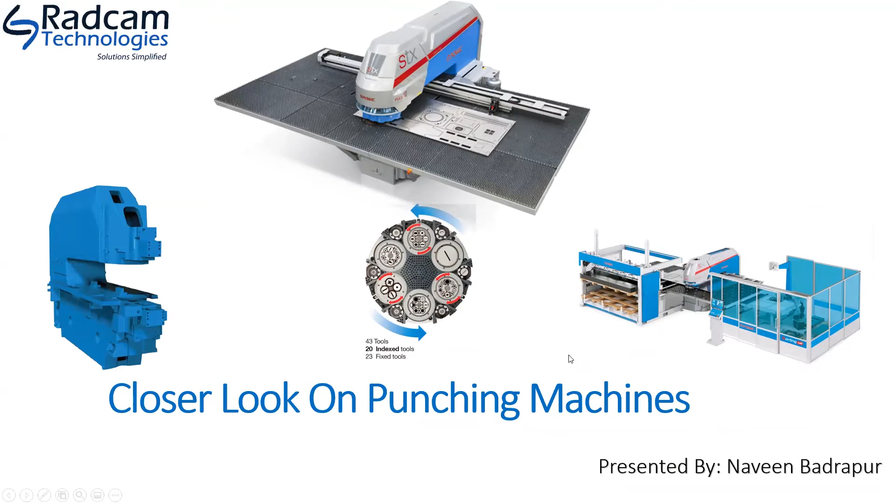Punching machines are basically programmed to move sheet metal in the X and Y direction to position it under a ram, which is ready to punch a hole or make a form in it. Usually, when we are talking about punching machines, most materials processed range from 0.5 mm thickness to 6 mm. That is the usual range we have.

As many of you know, the thickness a punching machine can process, most of that capacity, should be attributed to the tonnage the machine has. Usually the machines will have different tonnages based on the technology and everything. So the ideal range for punching machines is 2.5 mm to 6 mm thick. At 6 mm thick it's a little difficult to do forming operations, but punching and everything else is fine, that's the green zone for punching machines.

These machines may also perform 3D forms like dimples, taps, screw threads, electric knockouts. I hope you know electric knockouts, like we do when making electrical control panels - we use the knockout tool to create an impression, and during wiring they can simply knock out that part and take the wire through. So things like that, and louvers for airflow and everything. These forming operations are only possible in punching machines, you cannot do that in laser machines. So that's where punching machines come in.

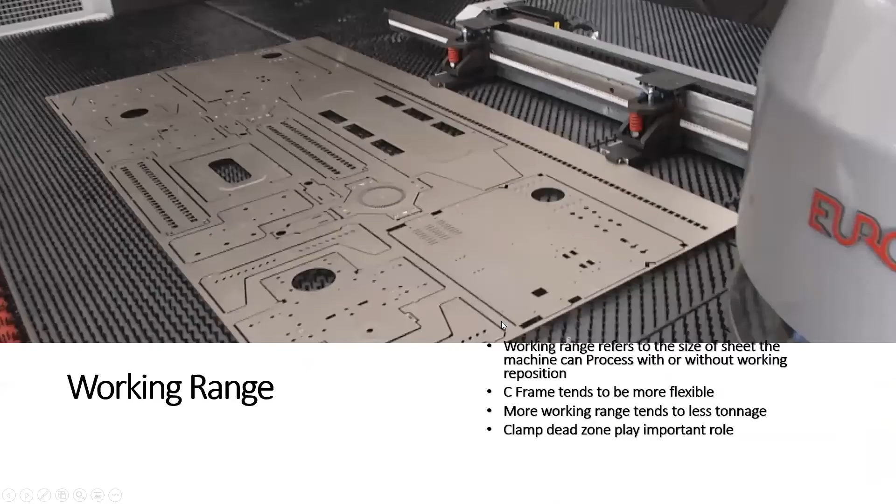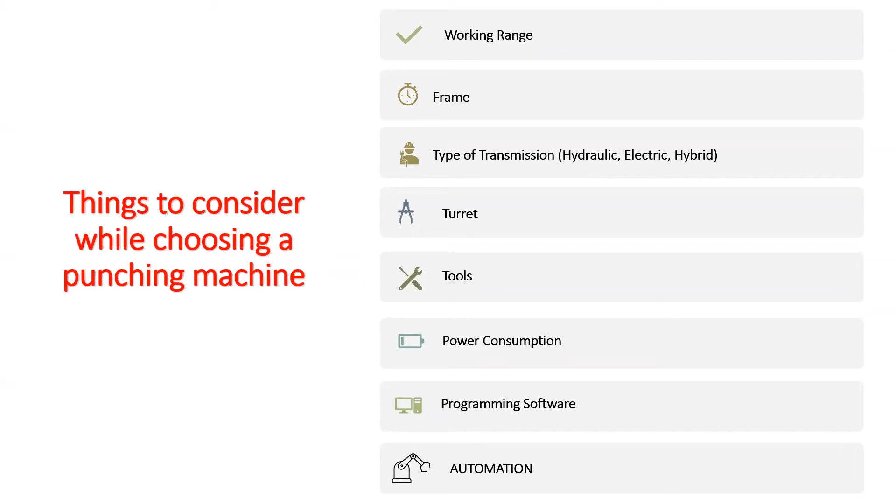What can be implemented with the machine, and can we add on some options after purchasing a machine, or should it come with the machine itself? That's the kind of things we can look into for automation. And then, without any further delay, let's start with our slides.

So the first thing is working range. I hope everybody knows what working range is - it's a very simple thing. Usually working range refers to the size of sheet metal a machine can process with or without repositioning. Usually the sheet metal machines will have clamps, and the clamps will hold the sheet and move it along the bed of the machine, bringing the sheet into a ram, where the ram punches the hole or forms the sheet.

So there are standard sheets like 2500 by 1250, that's why in feet we call it an 8 by 4 sheet. And then we have in width, 1500. So these are the two standards usually punching machines play with.

So why does the working range matter? It's very basic. If the working range is big, you can process bigger parts. If you have smaller parts, you can still work with a smaller working range, but the machining time will increase. That's the basic idea. If you have a bigger working range, you have much more flexibility.

Let me play a video that will show you exactly what I'm showing. I will play an O frame first, and we will see how the O frame works, then I will play a C frame and we will see.

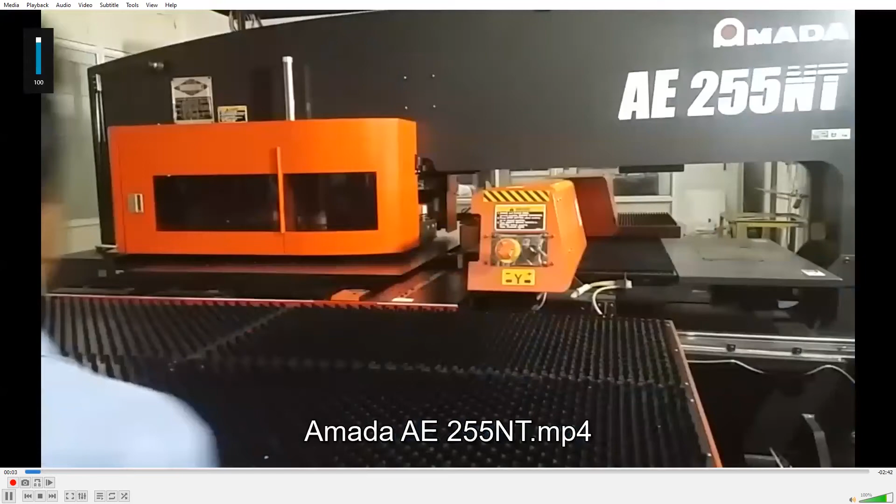As you can see on the screen, this is an Amada machine. Right now it has an O frame. I'll show you - the clamps are moving and it is able to punch the sheets. It will come a little darker and then I will pause and explain certain things. The turret is rotating, the tools are changing, and as you can see in this area, we have a sheet, clamps, a turret, and everything.

So this is the depth I'm referring to. I hope you are able to see my arrow - this is the depth I'm talking about. If you have this machine and they have rated this working range as 1250, that's it, guys - you cannot use bigger sheets than that, because there is no room here to accommodate such sheets. This is what we call an O frame.

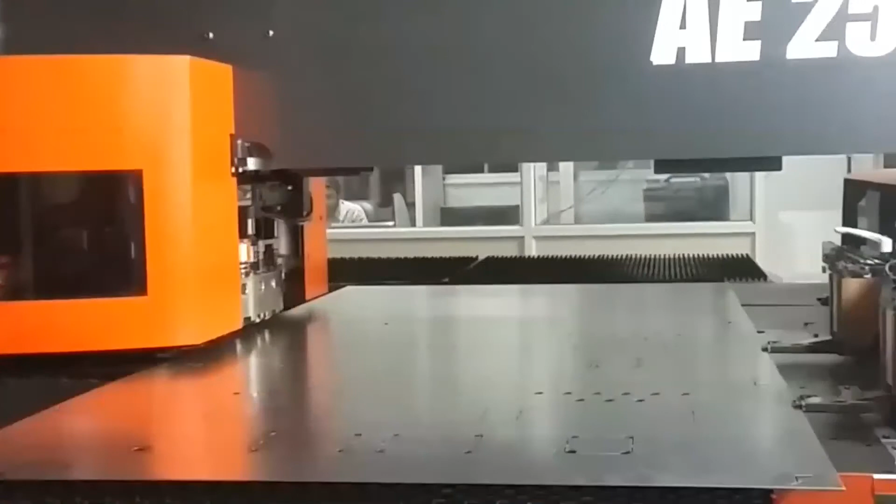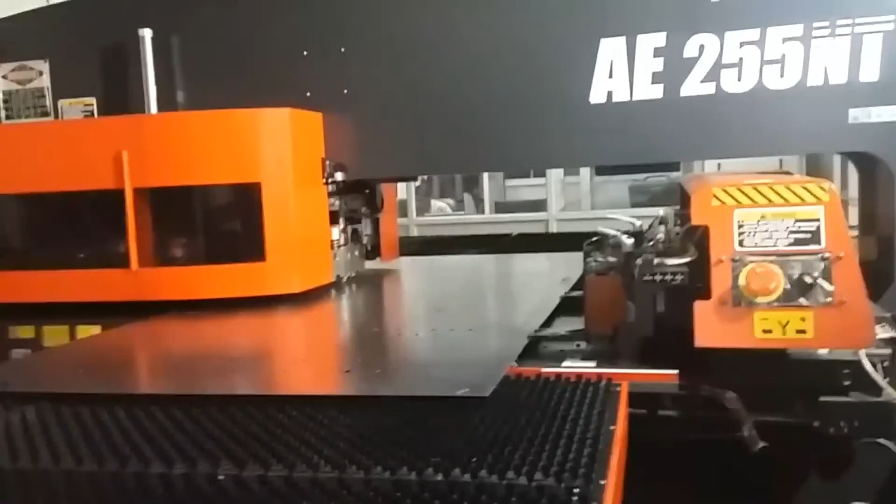In O frames there are also welded frames and casted frames. Of course everything is casted and then some parts are welded together, but some providers do provide complete casted frames - a single piece casted frame is also available, so you know the differences. The casted frame might give you better life and something like that. As you can see here, this is an O frame, and it's restricted by the depth.

So let me play a Euromac video which employs a C frame. So this is a C frame - as you can see here, is open. Just one side is open.

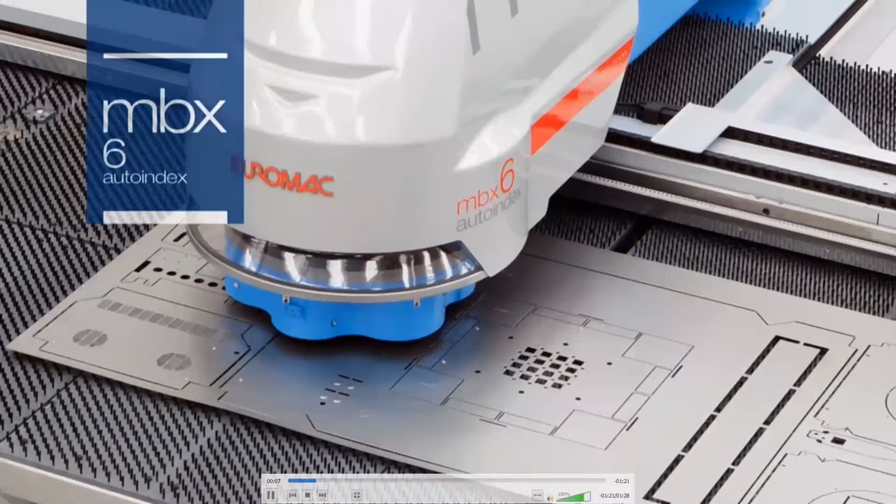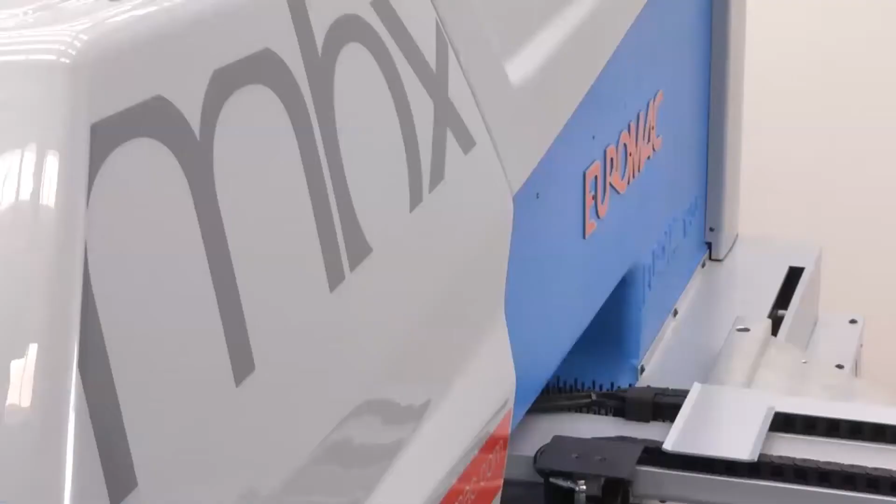Nitin Sharma is saying that two frames are welded and bolted. So thank you.

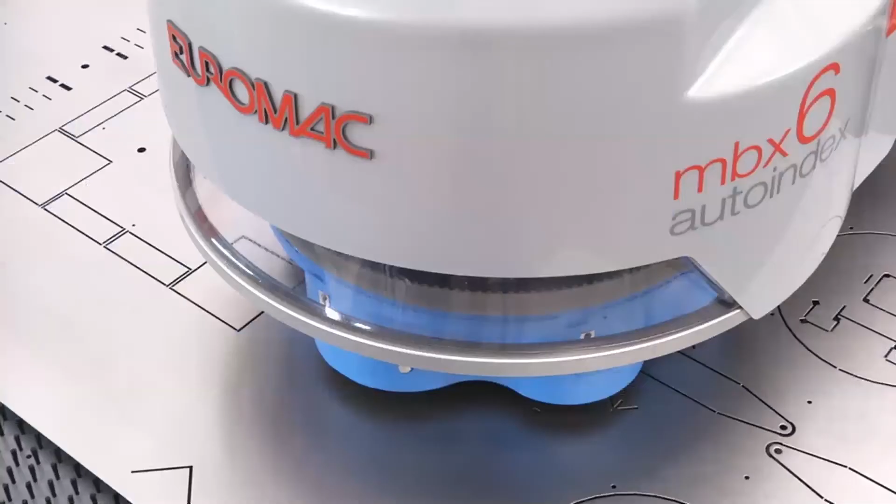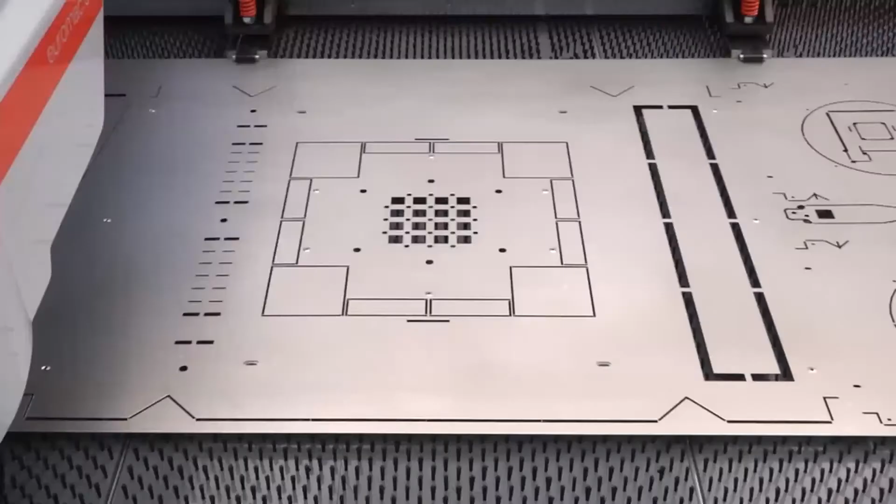Here, as you can see, in these C frames you have the flexibility to use sheets which may be bigger than the rated capacity. So a little flexibility never hurts, right? So this is the turret, and we will come to this a little bit later. Let me close this, we will go back to this.

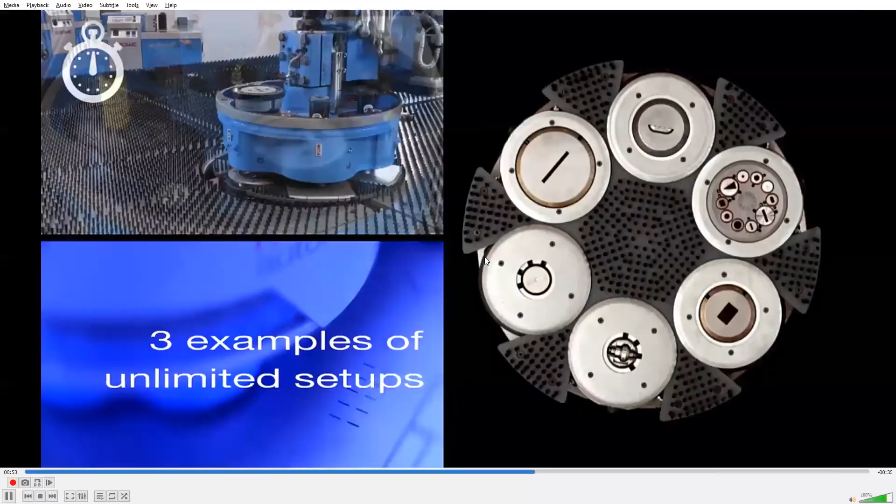So that's the basic idea - if you want a little flexibility in your work, you should go for a C frame, or if you are fine with rigid and fixed working areas, the O frame works just fine.

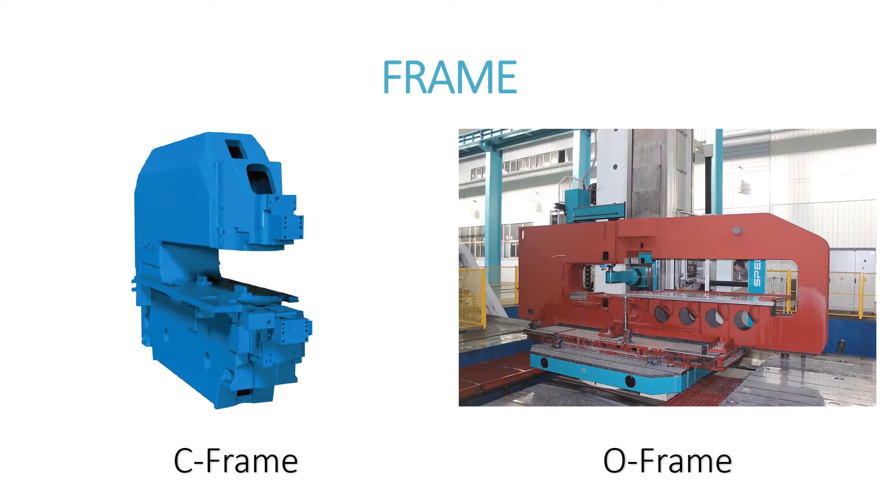This was supposed to be about a type of transmission. I'm missing a headline here, so I will explain.

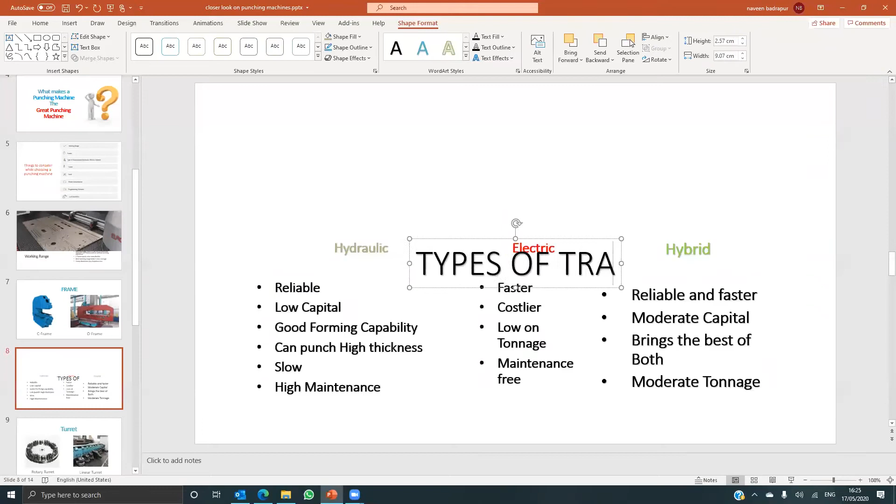Everybody has heard of hydraulic and electric, I guess. So what makes a hydraulic machine or an electric machine? Today we will look at why you should go for hydraulic, or why you should go for electric, or why you should go for a hybrid. I will explain what a hybrid is, and then explain what makes them special in their own areas.

So first we will go to hydraulic - robust, time-proven, a solid kind of transmission. It's been here since the industrial revolution, and we don't see a machine without at least one part of hydraulics in it.

The participants are sharing their thoughts - so please try to share your thoughts there.

So hydraulic is a time proven thing. Here the working principle is pretty basic - you have a hydraulic tank, and a pump to feed hydraulic fluid to the hydraulic circuits, and then you have a cylinder, and the cylinder delivers the power, and you get your work done. That's what we call hydraulic. Reliable - you get constant forces, and you can achieve a very good amount of tonnage in hydraulics. That's what we call reliable.

Let me show you a video. Yes, please, someone is asking a question. Okay, we lost him. I was having a little bit of trouble hearing you. If you can put the question in the chat box, I'd greatly appreciate it.

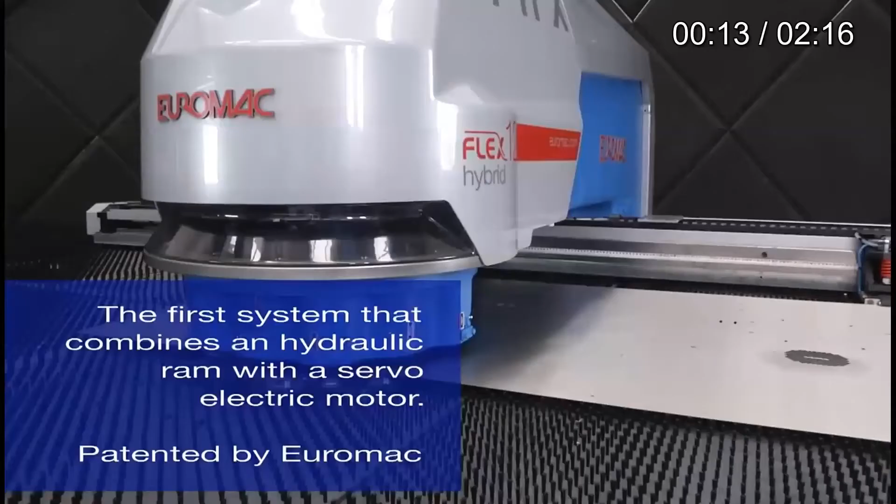So I have a small video to show you what exactly a flex hybrid is - an innate system that brings the best of two technologies, hydraulic and electric. Power consumption is very low because the majority of the force will come with the tonnage.

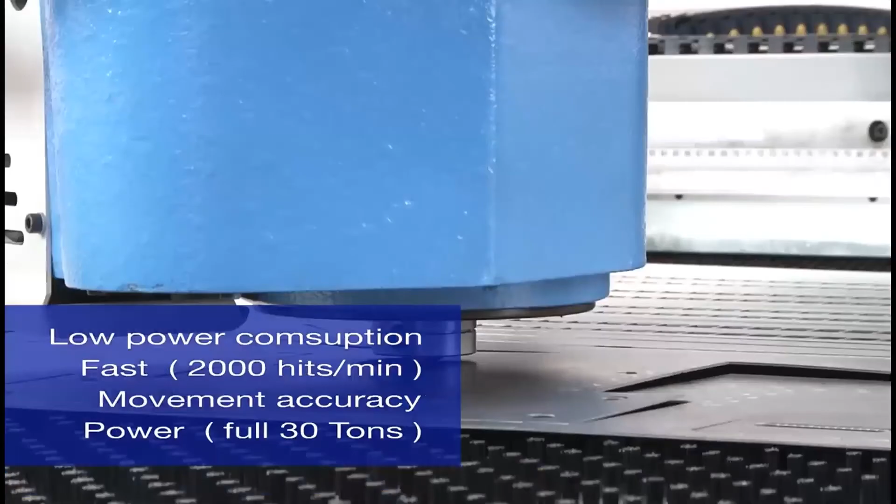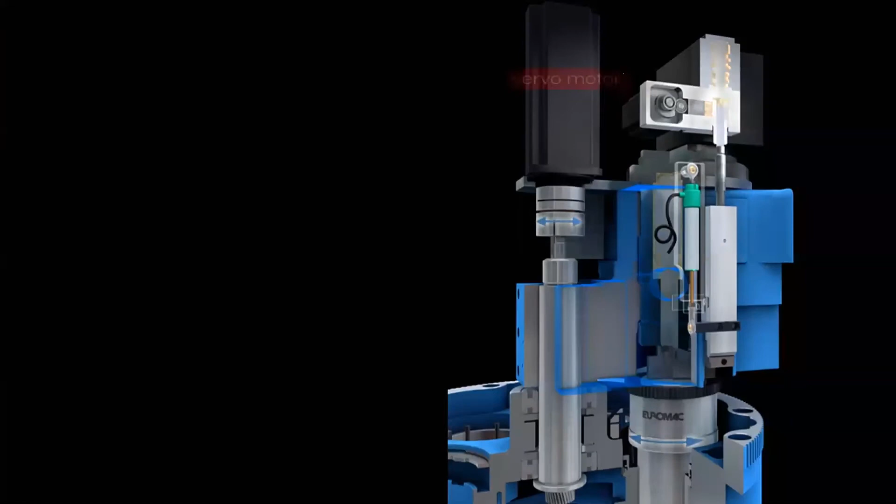This is a demonstration of a punching machine with punching, engaging and everything. We have a sheet loaded and it's moving. So this is the area - you can see we have a servo motor on the left side, and on the right side we have a hydraulic cylinder. The force will come with the hydraulic liquid.

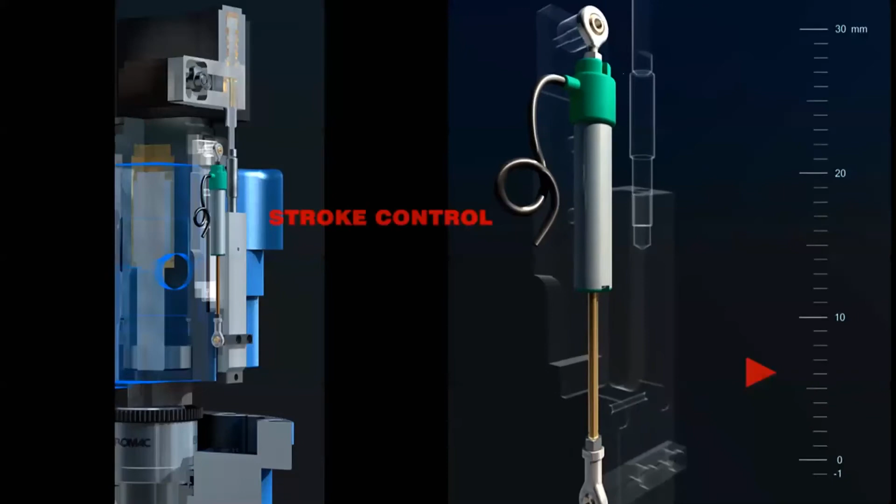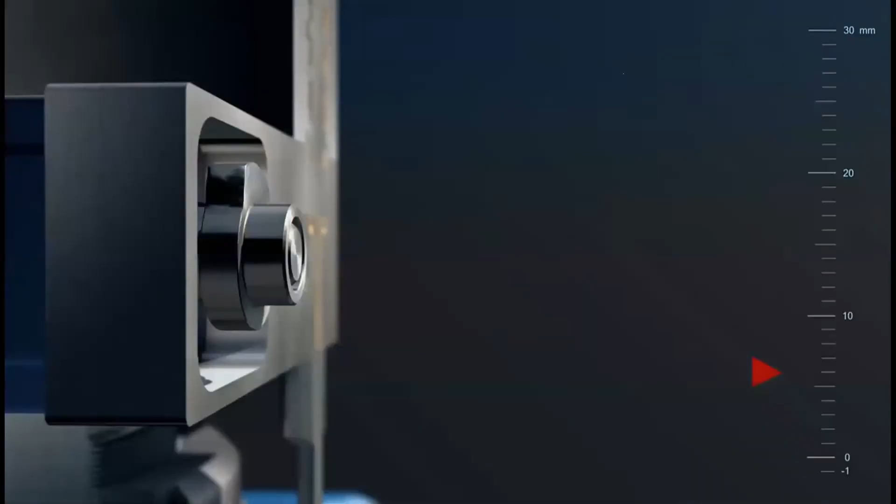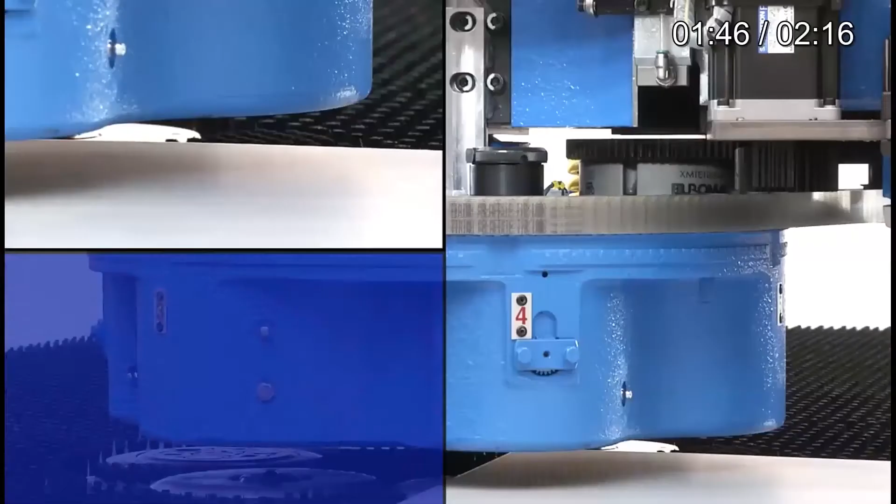But we have a servo motor here which will control the stroke length - how much it should go or how much it should retract. When we control that stroke length of the hydraulic fluid, it will automatically be able to punch in very fast numbers. We have a cam coupled to a motor, and it will deliver that hybrid system.

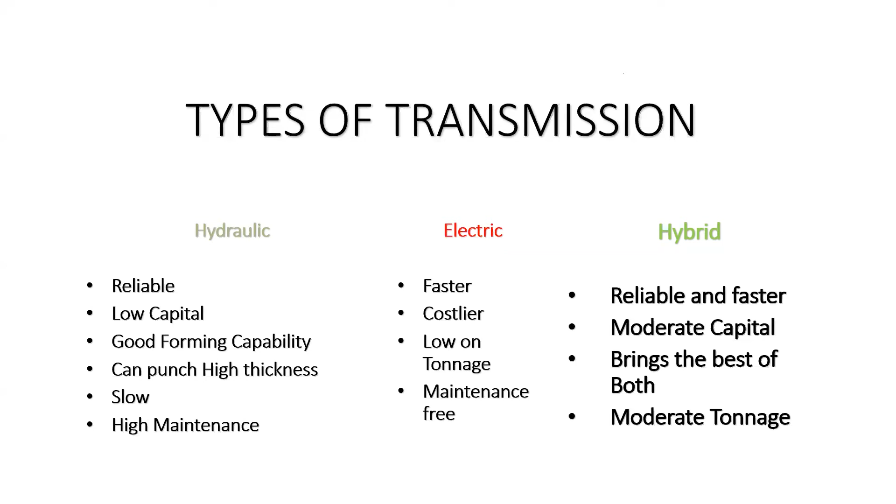So hybrid is actually incorporated with the Euromac punching machine. That's a patented technology - nobody can use it without Euromac's permission. Euromac has the hybrid technology, hydraulic machines, and a pure electric machine. If a customer prefers a pure electric machine, Euromac has that too. But it doesn't matter where the power comes from as long as it serves your purpose. So we have brought the hybrid.

Here you can see the turret is holding different sizes of tools - the size of the tool matters, I'll go briefly into that a little later. So here it's Euromac, Amada, Trumpf, and Prima Power - all employ rotary turret, except not Trumpf. Prima Power has a rotary turret, and Trumpf has a linear turret. So basically it's about the same, but...

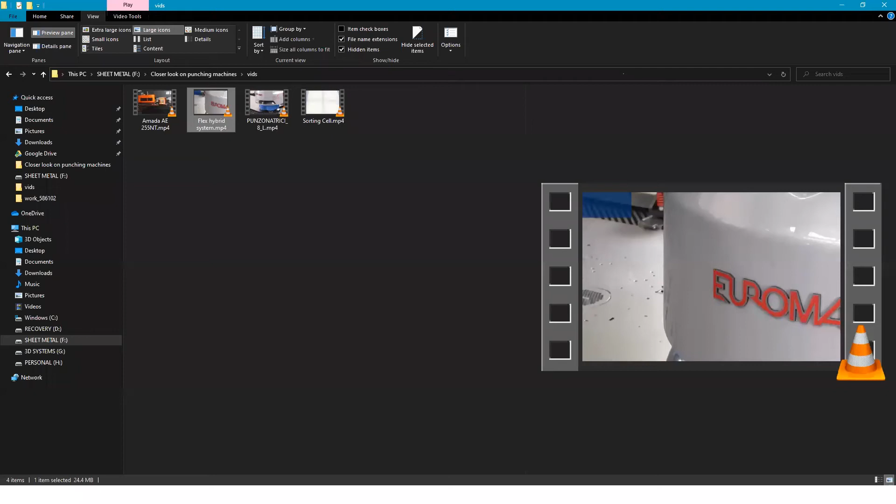Right now the Euromac is the only machine which gives you an all D station turret. We were playing a video at that time covering that. So yes, this is what we call a turret, guys.

You can see here, the Euromac has 6 stations. That sounds a little less in number, right? Because we just saw in the image that it can accommodate a lot of tools. Well, it looks like it can accommodate a lot, but this small turret can accommodate 60 tools - that's enough for everybody's production, right?

So you can see here, the turret already has 6 stations, and with the help of adapters we can use B or C stations. We have an A station there, a B station there, and a C station there. And one more thing - there will be auto index stations.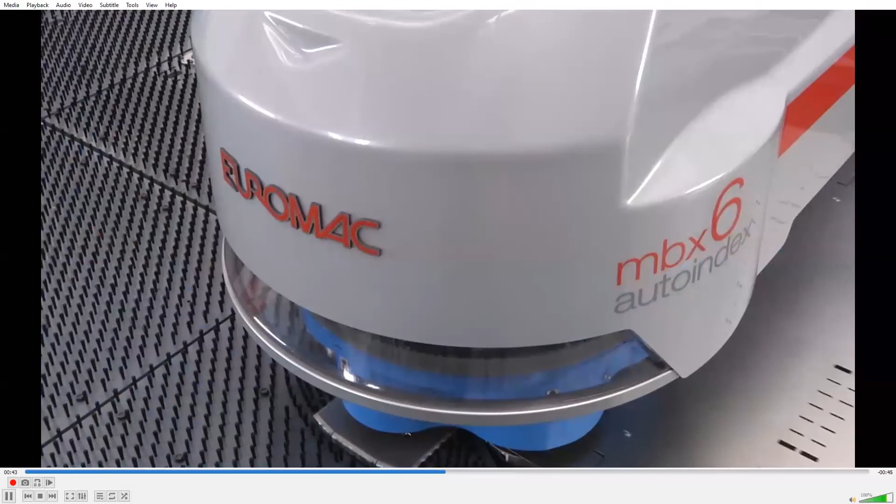Auto index means - usually for sheet metal tools we use rectangular or other shapes. So auto index means the tool's capability to rotate itself in any direction. As you can see there, some tools are rotating.

That means in that station, the tool can be rotated in any direction. Let me explain simply: if I want to punch a rectangle of 100 by 100, and I have a 50 by 10 or 50 by 5 rectangle tool, first it has to be positioned at 0 degrees, and I will punch the top and bottom of the rectangle. Then the tool has to be positioned at 90 degrees, and I will do the left and right sides.

So for this operation, we basically require 2 stations if the machine doesn't offer auto indexing capability, because the tool cannot rotate. You have to load one tool at 0 degrees and one tool at 90 degrees. But if the machine offers auto indexing capability, it will automatically rotate the tool and punch it in one go. That's what we call auto index.

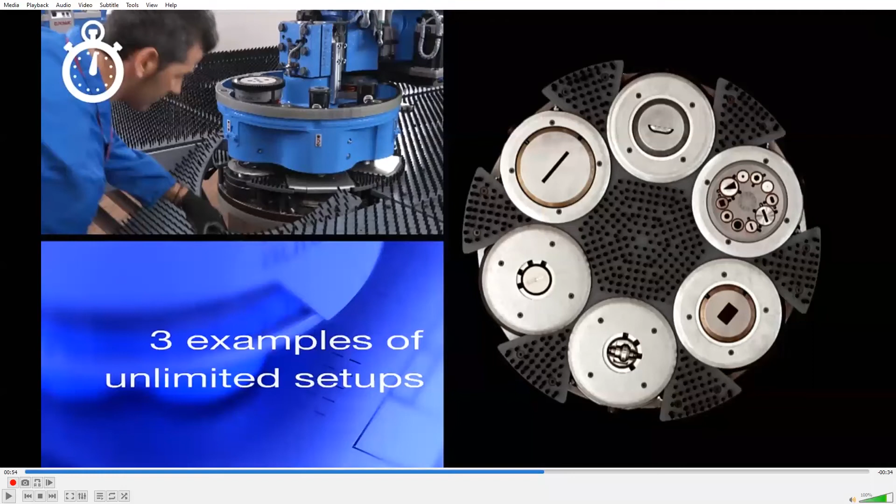Assuming everybody is familiar with those operations, I will just skip ahead of that. So...

The next step would be single tools and multi tools. Everybody is clear with single tools, right? It's a single tool, and it comes in all sizes: A, B, C, D. You can put it and punch it.

But we have multi-tool operations here. Multi-tool means it's a D station tool, so it will have a D station, and in a multi-tool we can house small tools, like you can see here. We call it an XMTE10. In the XMTE10 we have 8 A station tools and 2 B station tools. We also have the XMT6, where we have 6 B station tools and some 4 slightly bigger B station tools.

So why should we load these into multi tools, and why should we use multi tools? Like I said, Euromac comes with a 6 D station turret, and out of 6 stations, 3 are auto indexed. This is very important, and I'll tell you why. Many machines will offer you only one or two, up to 4 indexed stations.

Right now they are offering the multi-tool capability, but they are not up to par. If I have an index station and I take this 10-tool multi-tool and put it in an index station, all the tools inside that multi-tool will automatically become indexed. That's a lot of flexibility for you. You don't have to spend money on purchasing tools in two numbers or something like that, because you have a lot of auto indexed capability here.

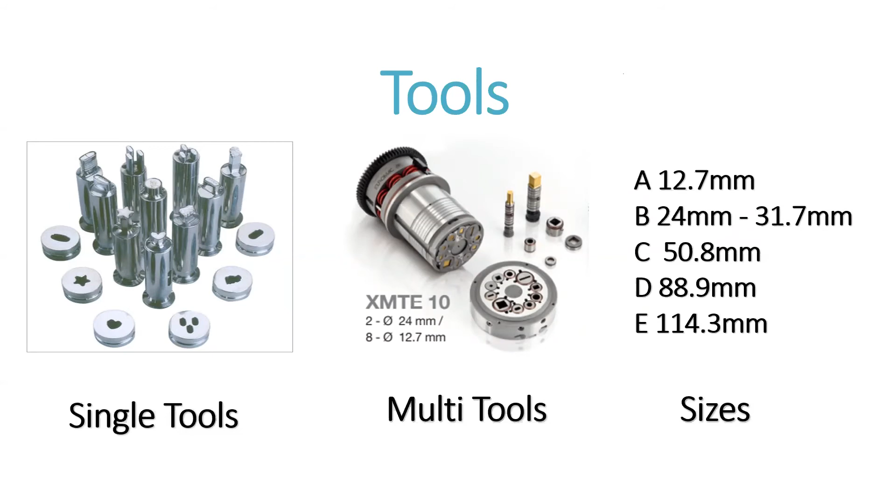So with that, if I load a 60 tool turret here, 30 tools can be indexed, and that's a very high number. We can talk about this a little bit deeper, but it makes more sense when we see a product. So if anybody wants to know more about those turrets, shoot me a mail or a message at the end, and we will take a look at that.

Then we have power consumption. It's important, right? You want to have a low running cost of the machine. You don't want to spend a lot of money running those machines. So that's where the power consumption comes in.

The first factor that affects power consumption is rated capacity, as specified by the manufacturer. Usually the rated capacities go around 12.5 kilowatts for other machines, and some machines offer 7.5 kilowatts. Depending on the tonnage and transmission, hydraulics use a bit more power, while electric kinds are a bit more environmentally friendly, and then there's the speed.

That again comes to transmission. With hydraulics, you can punch a high number of hits per minute, and you'll get your job done in a lower time, which automatically gives you less power consumption. So it's very ideal that you take a look at how much the punching machine consumes in power when deciding to finalize a machine.

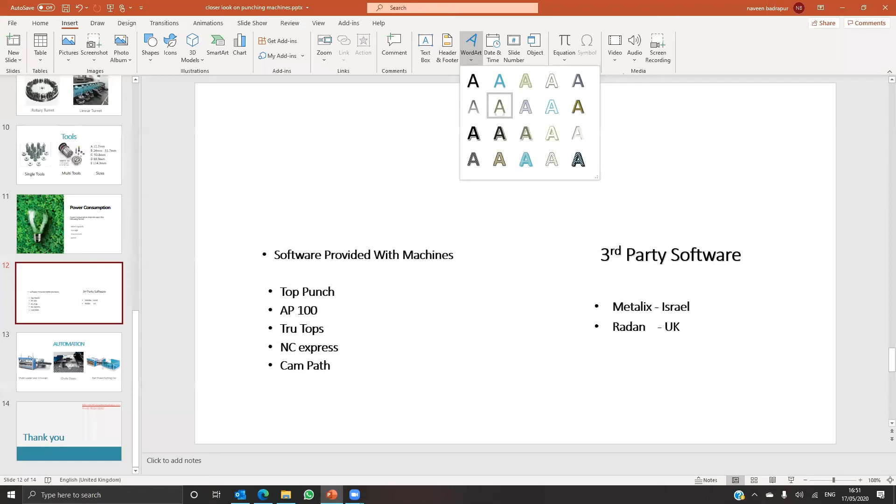So again, I have lost it here. Very sorry about this. Let me just put... okay.

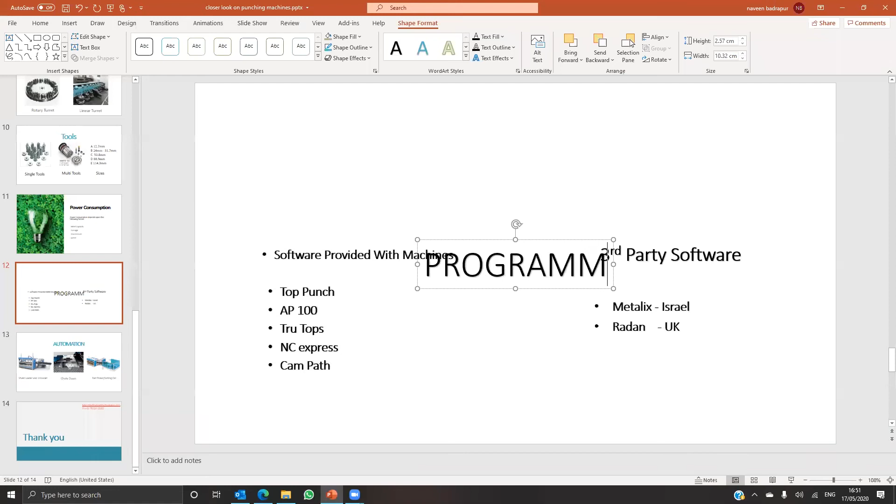Everybody knows that the machines we are talking about are CNC machines. CNC means computer numerical controlled machines. So in order to perform punching operations, we have to program the software. We have to program the machine. That means we have to generate a program and feed it to the machine, and then the machine works.

Having a machine is one thing, and having the capability to program it to do very efficient machining is a whole another thing. That's very important, because it's not just about how powerful your machine is. Even if we have a high-end, big, sophisticated machine, if you end up doing the program very poorly, you will not get the benefit of using the machine's capabilities. So it should be very ideal that we make the programming very efficient.

Usually the machine providers will give you a software to do a program, so I have to differentiate between two kinds of software: the software that is provided with the machines, and third-party software. Usually the machine manufacturers will give you one basic software, and that will work just fine. We have to keep in mind that these are machine manufacturing companies, so their main focus area will be machines. So they don't give a lot of attention to the software.

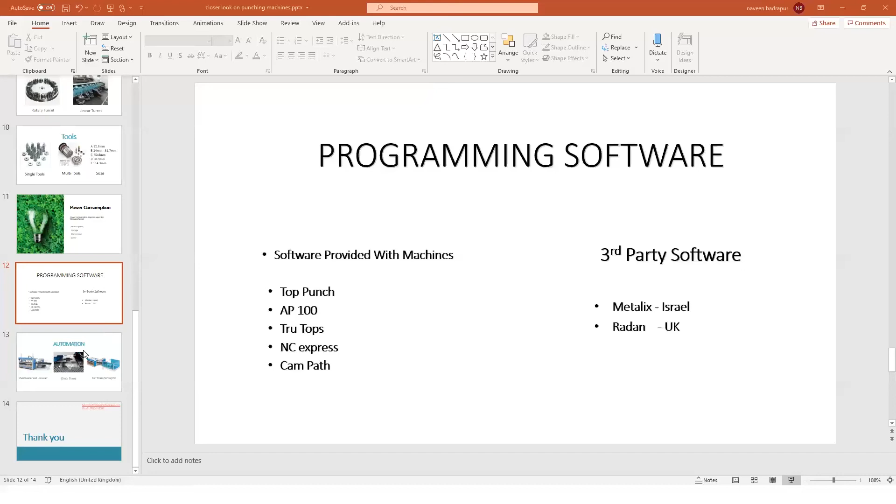Then we have automation. Like I said, it's not everybody's cup of tea, but we are in Industry 4.0, so we should look into automation options because labor is a very complicated area. Basically, automation in sheet metal punching means we can automate the machine to load the sheet itself, process it, and unload it.

That's what we call a sheet loader and unloader, and we can automate the machines. Usually when you finish punching the sheet, you have to manually remove the parts from the sheet and send it to the next level of production. If you want to eliminate that, so the part immediately detaches itself from the sheet and gets processed as soon as it's punched, that's where the chute door comes in.

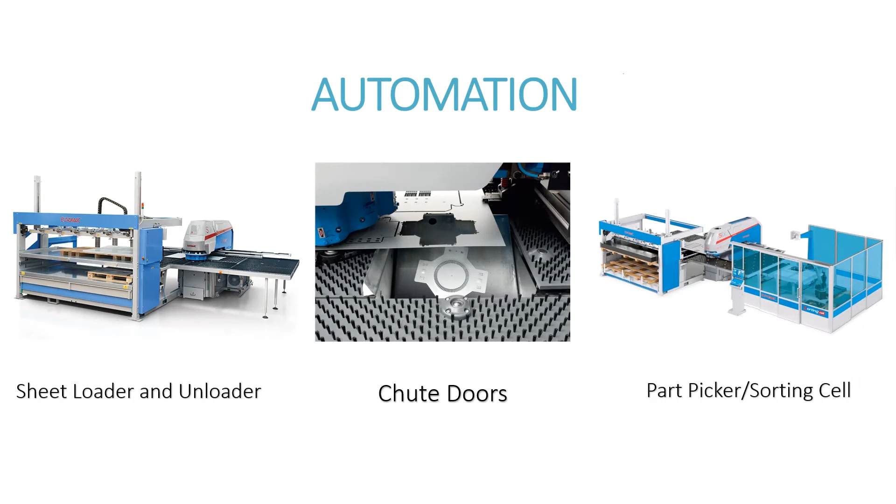And then we have a part picker or sorting cell. Once the part is collected in the chute doors, we can automate the machine to pick that part and sort it in a certain way so it can be processed for the next phase.

So I will show you one brief video with implementation of all three technologies: loading and unloading, then a chute, and then part picking. Many people implement different technologies, but basically this is the idea.

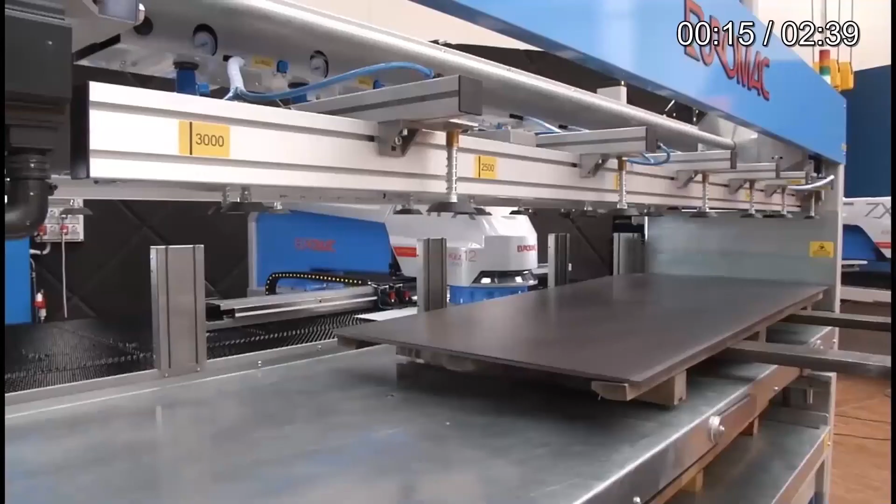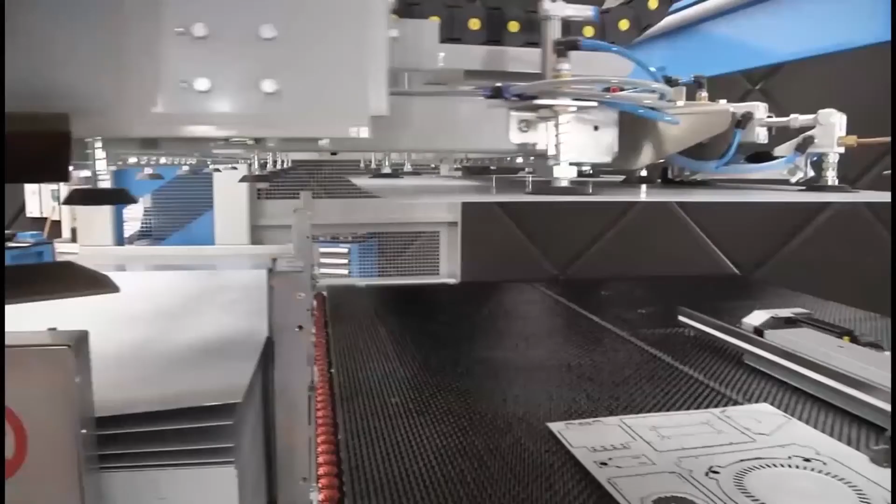You can see here we have a punching machine, and on the left side we have a sheet loader. The operator loads sheets into this, and from here the machine takes care of checking the thickness and loads the sheet. This sheet has been completely processed, but we have to manually remove those parts. If some customers don't want to do that, that's where the chute door comes in.

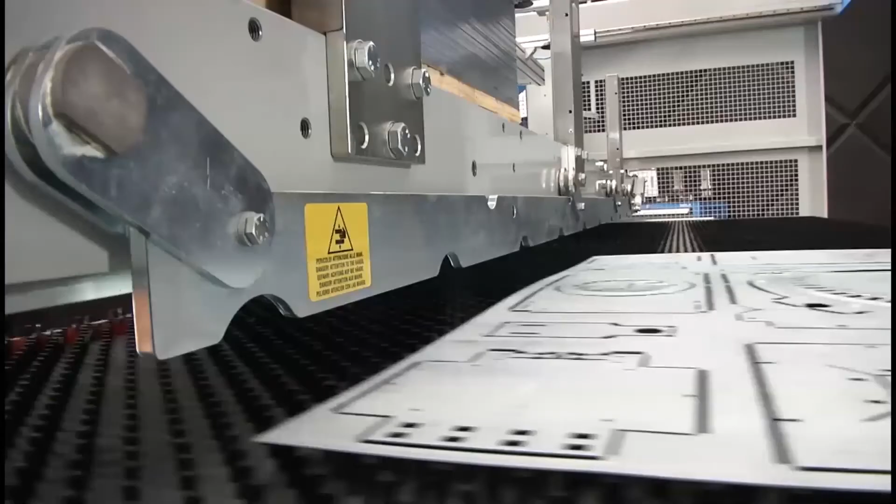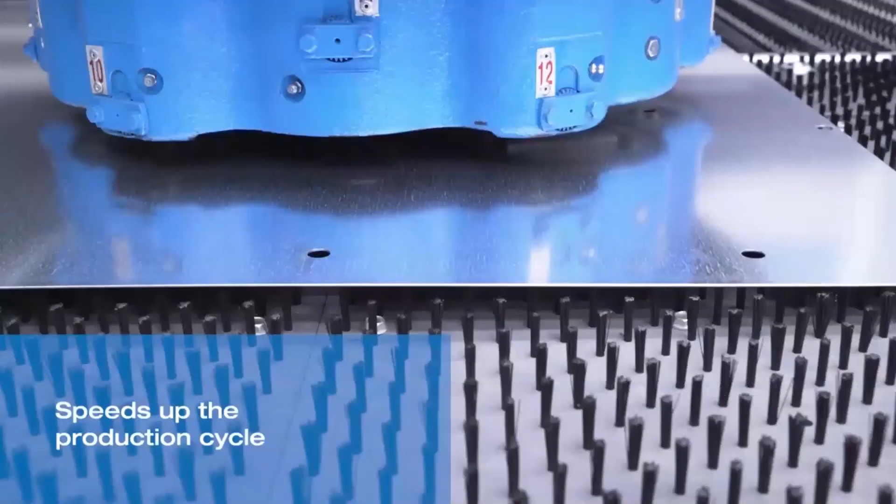Now it will unload the sheet and load the new sheet. Right now it is loading a new sheet, and the punching starts, it is punching now. Once the part is there, the chute door opens and the part comes out.

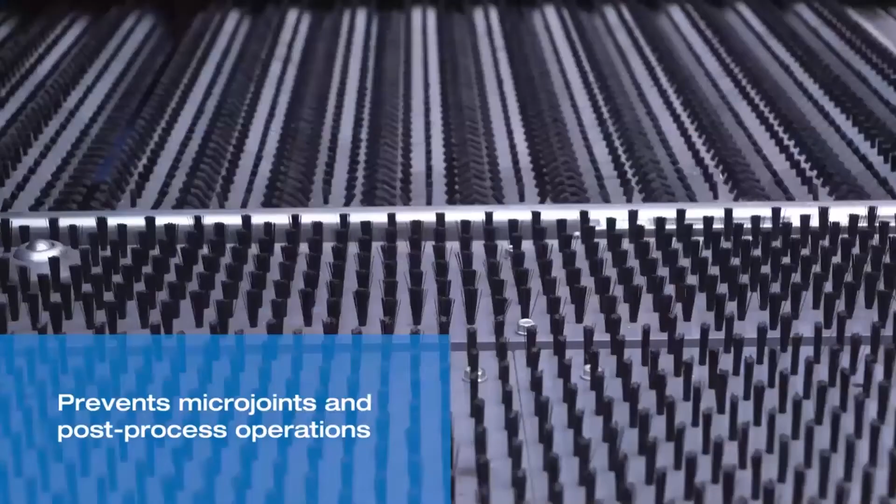Now the robot will pick up the part and sort it into its area. We can designate where it needs to be dropped, and it will automatically drop. Now you can see it finish one more part, and that part will automatically go through the chute, dropping it onto the conveyor belt, where it is automatically picked up and dropped. Simple, right? This is basically what happens.

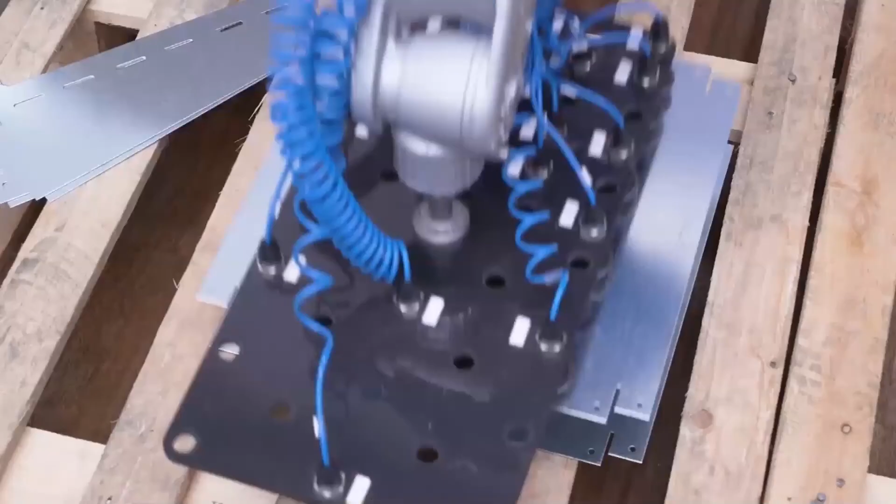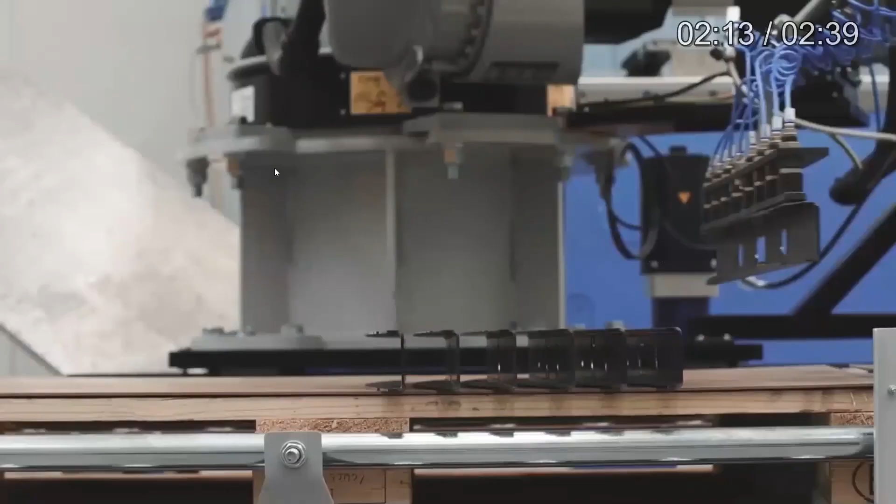These automation options don't come cheap, that's for sure, but consider the productivity they can offer. This is a press brake - from here we can also offer press brake automation, but let's not go into that now. We can have one more session for that.

So we can automate the machines with sheet loaders and unloaders, and we can have chute doors and part pickers. These are upgradable options in every machine. No machine manufacturer will force you to go for these options and impose those economical repercussions on you - these are exclusively optional. You can choose these options only if you want to.

So that comes to the end of our presentation.

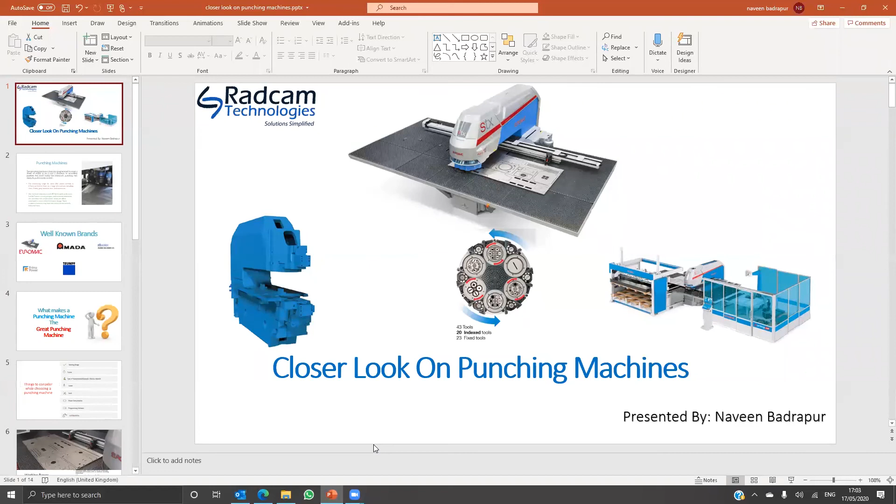Please, for Govind sir, I will just be going through slides 1 to 4. If anybody has questions - yes sir, the first... yeah please, someone was asking a question. Govind, I have some questions. After slide 1, yeah the 1 to 4 slides, I will ask.

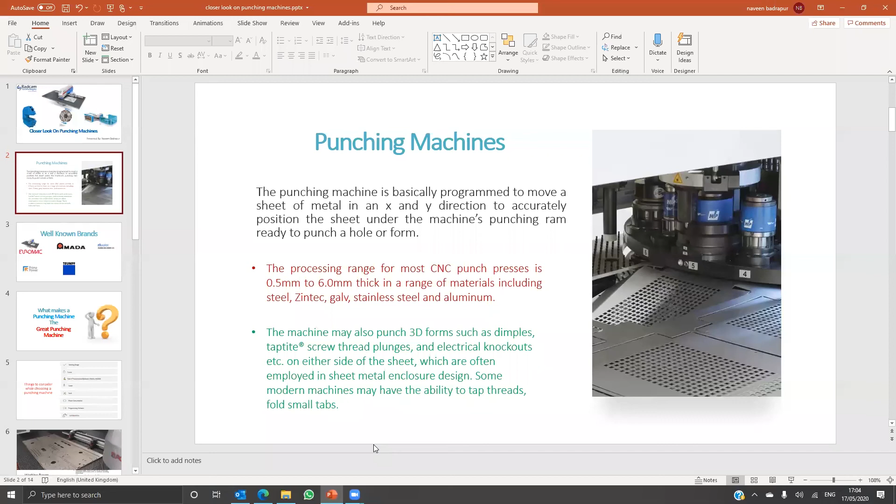Okay, so the first slide is just a cover page, and the second slide covers basic definitions of punching machines. Then we have the thicknesses a punching machine can process, 0.5 to 6 mm thick, and well-known brands: Euromac, Amada, Muratec, Trumpf, and Prima Power. Euromac and Prima Power are from Italy, Amada and Muratec are from Japan, and Trumpf is from Germany.

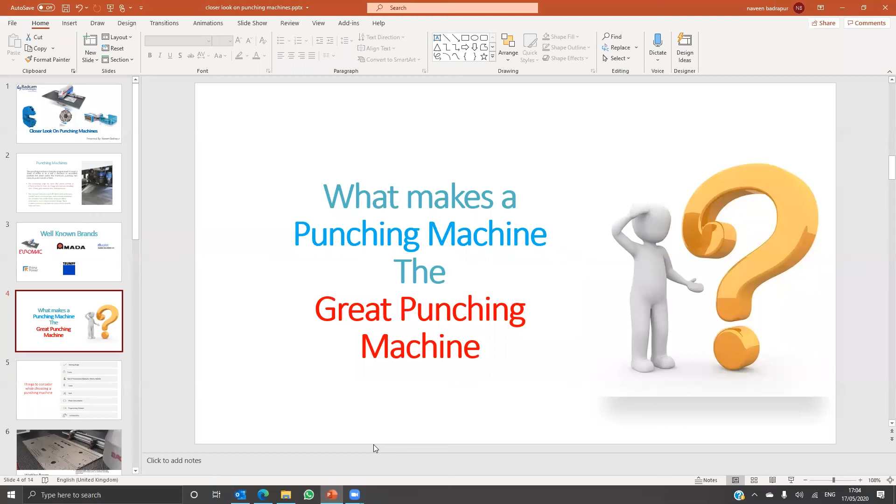In the fourth slide, we ask the question: what makes a punching machine a great punching machine? From here, we finalize some factors to consider while choosing a punching machine.

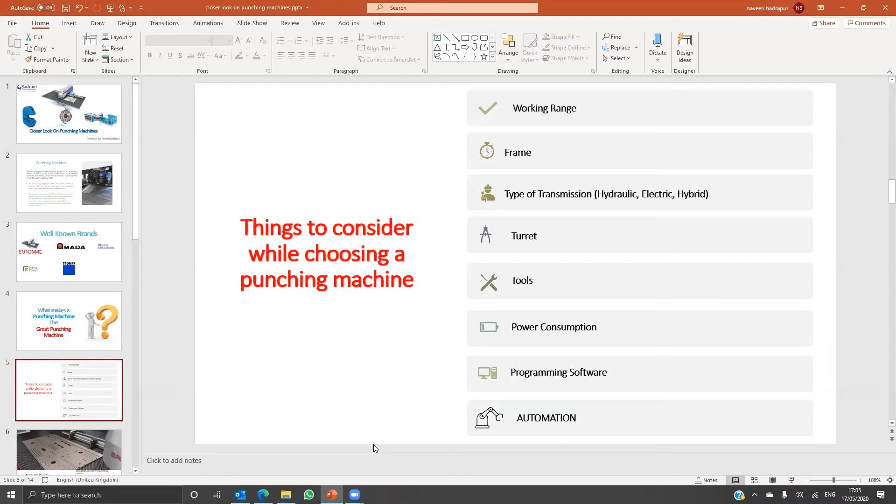Yes, sir. Usually I will take an example of D station, because E station is not a heavily used station - D is a very popular station. That's why single tools and multi tools come in. If you put a single tool in D station, that's only one tool.

But if you use a multi tool, here you can see a multi tool - I can put 8 A tools and 2 B tools, and if you put that in a station, you can house up to 10 tools. So with the help of multi tools, you can load more than one tool in one station.

So that's what we call it. And if D station already has a D tool, if I want to put an A tool in number 3 or 4, can I make such an arrangement? No, if D station already has a D tool, you cannot put any more tools.

But if you want to put 4 or 5 A station tools in D station, you can use a multi tool and put it there, and you will have multiple A tools or B tools. You can put multiple A or B tools in D station, sir.

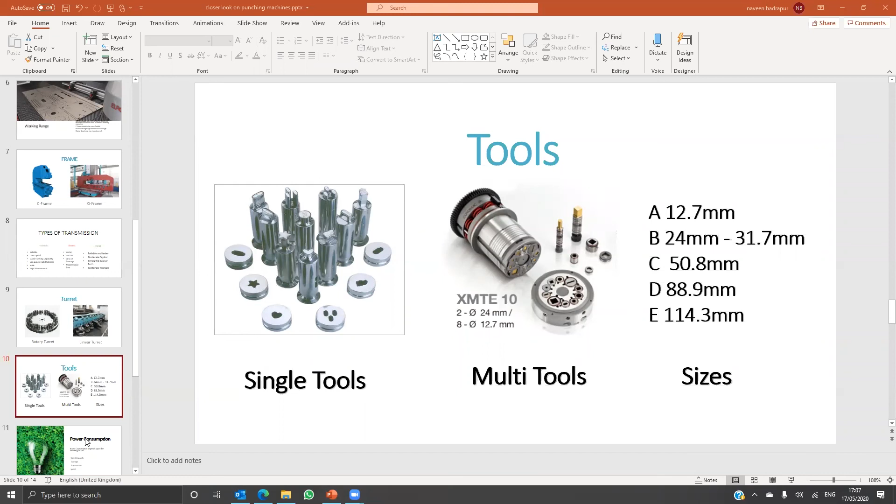Okay sir, the third and last question. You have shown some automations - the automation of lifting. Have you provided a separate arrangement for that?

Yes, we can do that. These are all completely optional. If any punching machine already has chute doors, it's very important that the part has a conveyor belt or something like that. We can provide that.

We can provide a separate picking system. We can give a separate sheet loader and unloader. We can give a separate picking cell. We cannot give a separate chute door - that has to come with the machine. But the first and last options can be given independently, sir.

Sir, you have told there are some thickness detection systems, particularly for blanking. Yes, sir, I will show you.

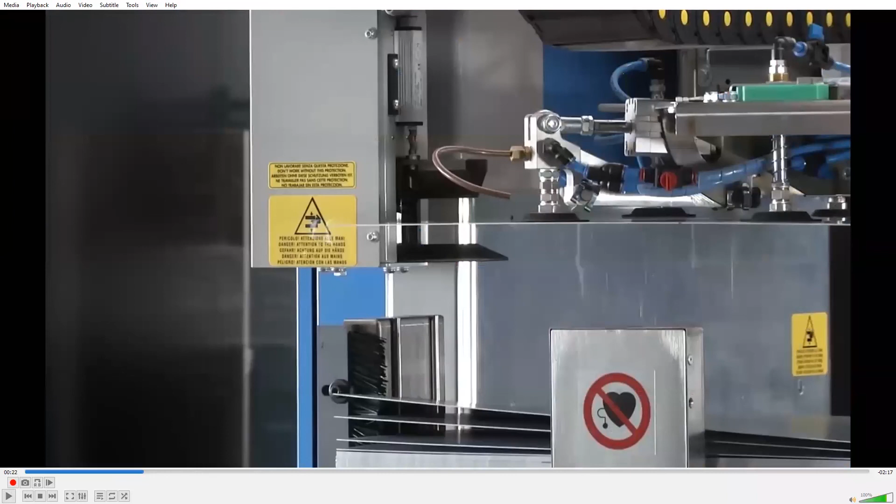This is a thickness detection, so I will show you one more time in one piece. It will come and engage and detect the thickness. That is where the minimum thickness - usually we can process from 0.5 to 6 mm.

Okay, thank you sir. Thank you, thanks a lot. Yeah, thank you very much. We always welcome a lot of questions.

Vikas Tapir has put a question in the chat box: what is the minimum bridge that can be achieved during blank nesting in turret punching for various thicknesses of parts? If you have rectangular parts or simple blank nesting, we can achieve zero bridge cutting. I will show you how.

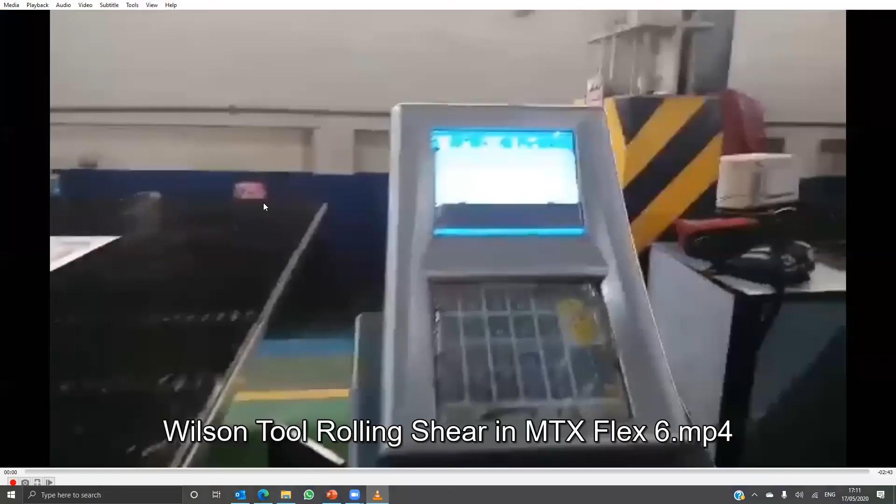Zero bridge cutting means we essentially shear the parts. We have shearing tools for that. Let me show you a video for that. This is what we call a rolling shear tool.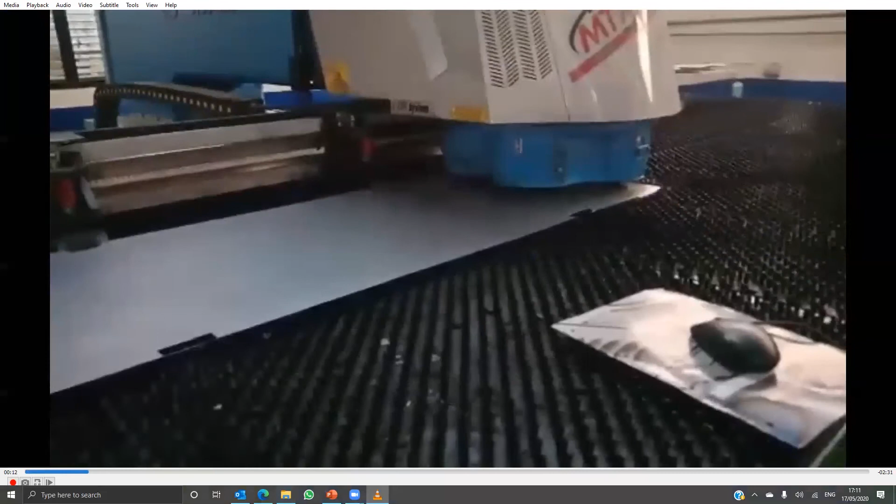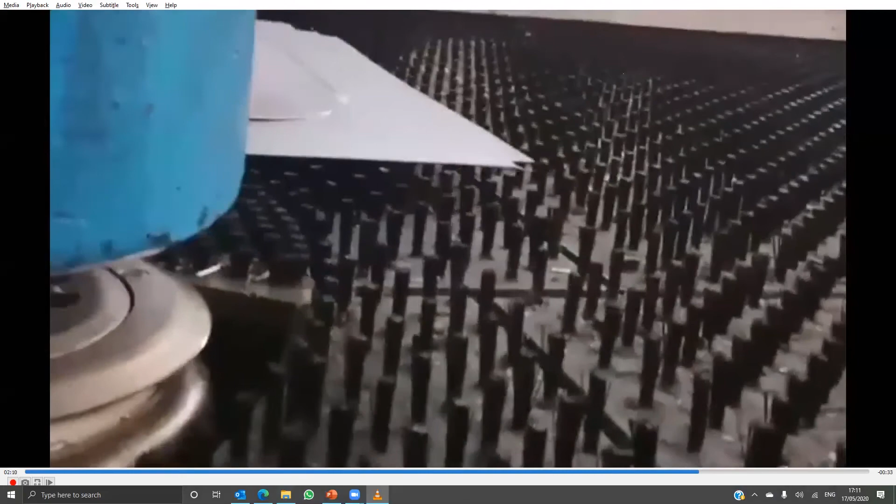Now it has engaged. You can see here it is essentially shearing the sheet. This is a roller offset. Now it is shearing. I have a better video for that.

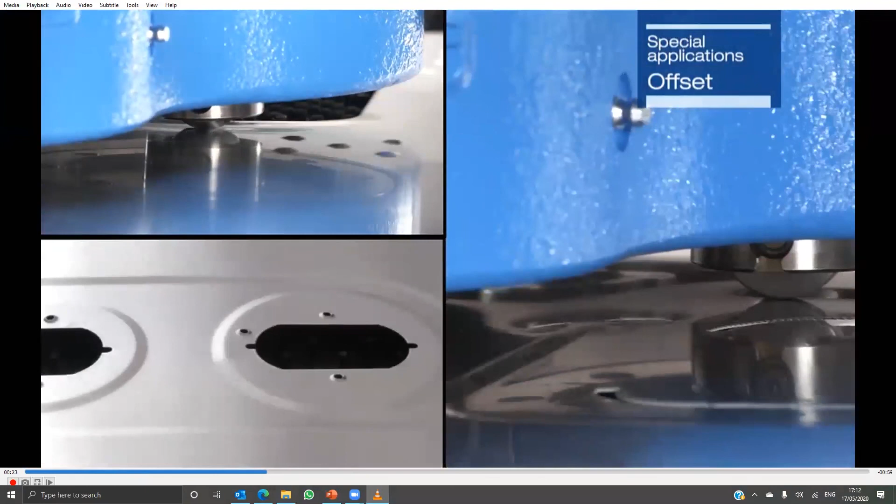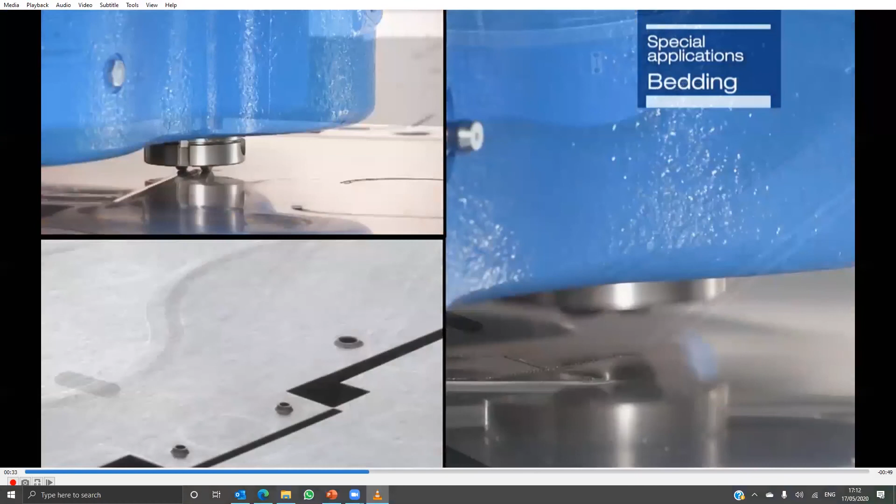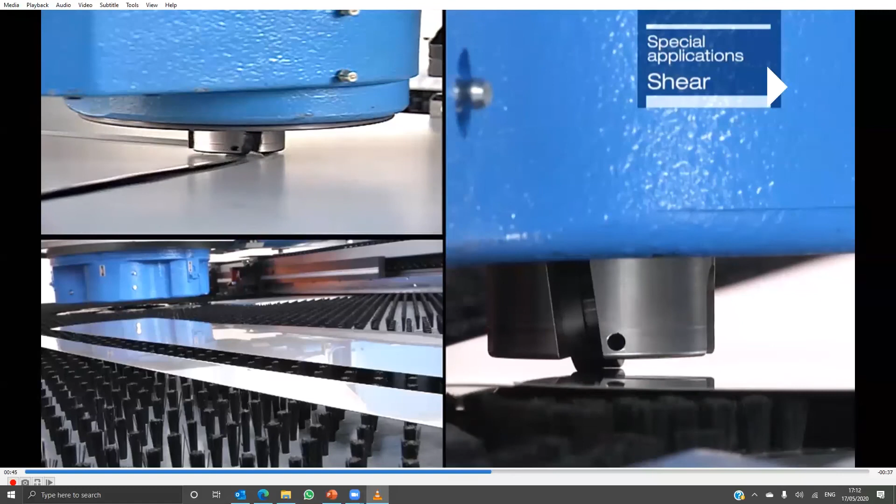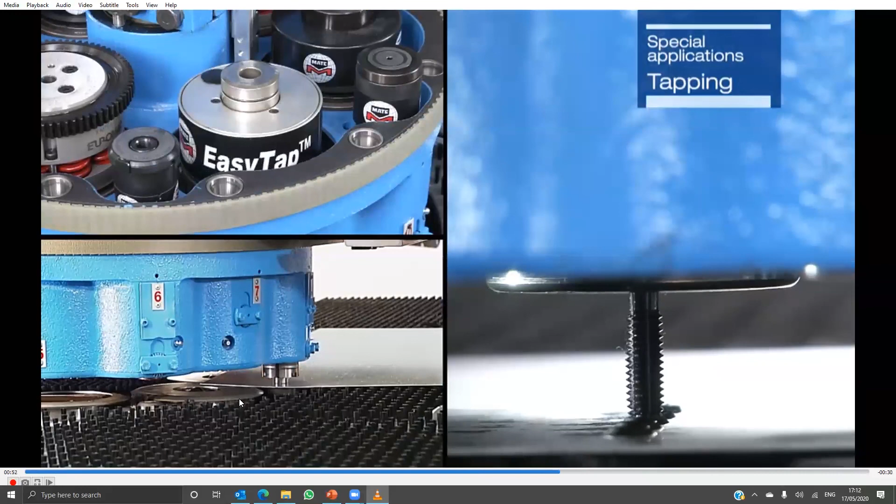This is what we call the roller tools. Just a minute, it's right here. As you can see on the lower right side, we have a shearing tool. Usually the shearing tools work for linear or straight lines. So if you want intricate shapes cut, the minimum bridge size we can go up to is with tools for 2.5 mm wide, so we can go up to 2 mm wide bridges.

But with the use of Ultra TEC tools from Mate, we have achieved 0.5 mm also. This depends on the part thickness or sheet thickness - yes, it depends on the thickness.

Okay, thank you so much for that question. Thank you. So yes.

You told the minimum, but what about maximum blank size, sir - 6 mm? We can shear 6 mm thickness.

No, it is not about thickness, but the size - width and length. The working range of the machine is 2500 by 1250. So we can shear everything that is within that working range.

One last question, sir - about the safety of the operation. Like, this is a rotating part, tools are rotating, and there is a punching operation. Some people can put their hand in between the two parts and get punched. What type of safety do you have?

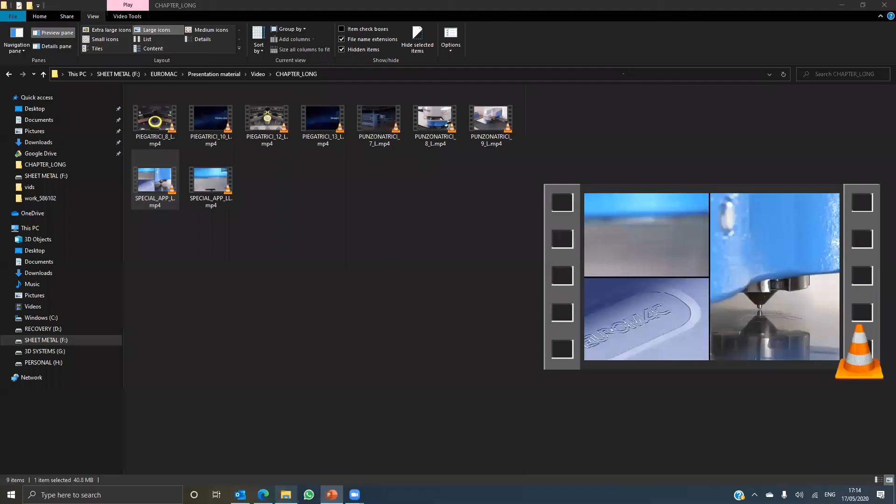Usually the turret that is rotating - in order to reach that turret, you have to remove one table. You will be able to reach the turret only if you remove that table, sir. I will show you that table. One second, I will show you a video so you understand better.

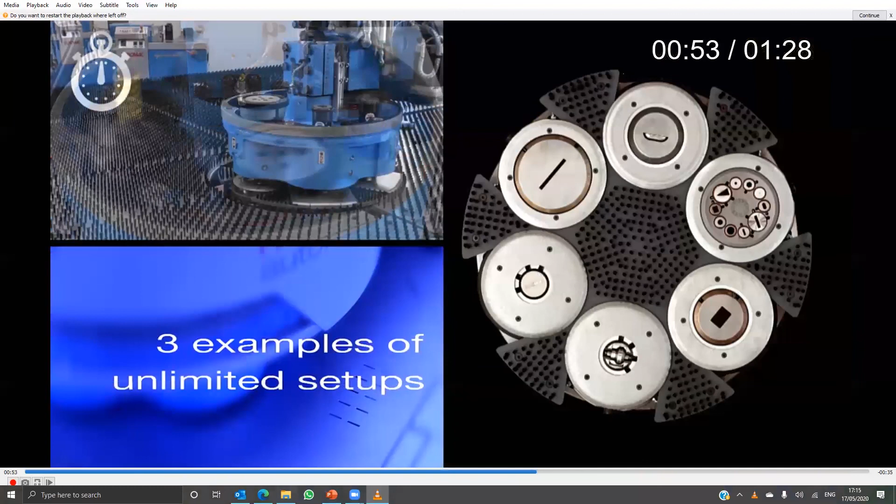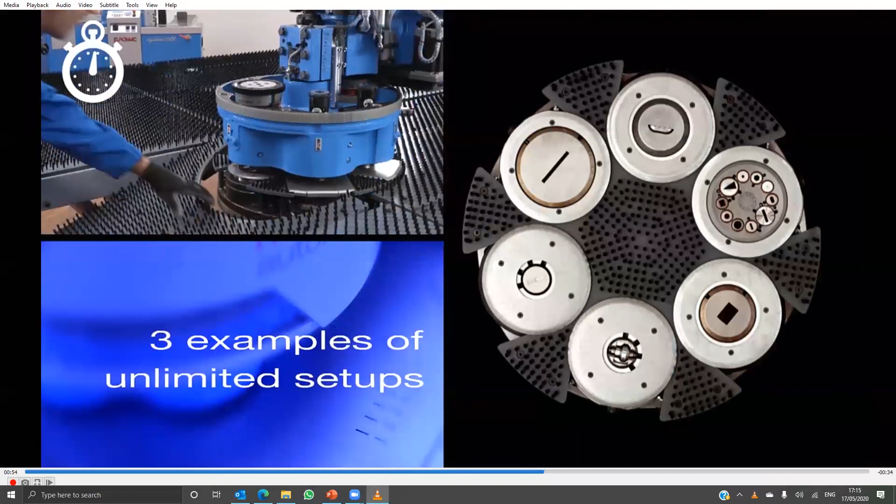In this video, you can see on the left hand side, the operator will remove the table. He has to remove the table in order to access that turret, sir. If that table is not engaged, if the table is in the low position, the machine will not start.

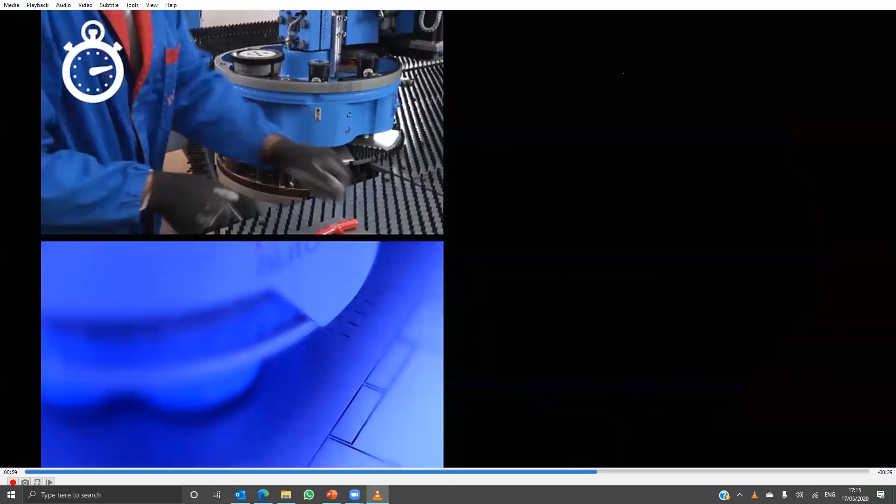One more thing is we can have laser mounts at the beginning of the machining area - we call it a photocell. If any personnel go beyond that area, the machine will automatically stop. So we have that safety operation also.

What is the changeover time, particularly for the turret or tool changeover? The tool changing time is 45 seconds. Thank you, thanks a lot.